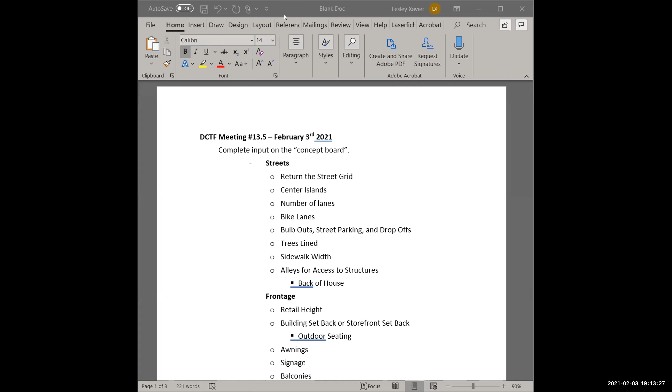All right. Very good. So I'm gonna basically mute myself. What I'll do is I'll give a little prelude of what the topic is, and then I'll mute and I'll take down notes for everybody. And then I'll send them to Lesley so she can send them out, because I don't want to be in violation of the Brown Act.

And that way, if there's any corrections or issues, we can make those corrections. And if there's a little bit of additional feedback, you can clarify, and then we can get this over. I'd also like Atisha, if you're very familiar with the concept board, so if you need to mark up certain things or we need to pull in the screen because there's specific areas we want to address, differences, we can do that and then mark that up so that they can have that document as a working document.

Is there any way, Leslie, you can pull up the concept board too partially and just keep this to the side? Sorry. Yes, I can. Okay. Awesome. All right. So I hope this helps.

Go ahead. I was going to say, just to clarify, we have no items on the consent calendar this evening, and we have just this one item on general business. And this is the continuation of the December 17th task force meeting discussion regarding the task force comments on the concept board presented by the consultant at our November 19th meeting. So there you go. Thank you, Chair.

Please proceed. So do we need to close the consent calendar? No, we had no items on the consent calendar. We don't need to close. Okay. So we can just go on with our one item on general business. Awesome. And so is this what you wanted me to show? Do you want me to scroll down through it? Do you want to go over this or?

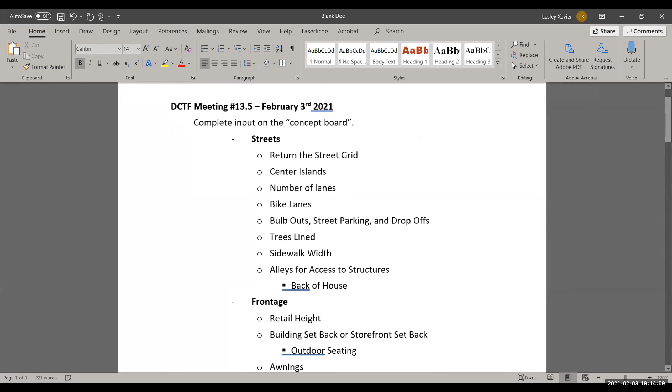We could briefly go through, like I explained. So we'll have streets, and I put in some bullet points that hopefully will spark some discussion points. Frontage talks basically about what the experience is on the actual ground floor. So that would be mostly like a podium deck or retail. Rhythm of the blocks is really making sure there's some synergy within the downtown. So it can be diversity, it can be lumping certain things together, retail size and placement, to make sure there's a good flow. And then buildings is going to be massing, building types if we want to talk about it, rooftop, and then architecture, which is important.

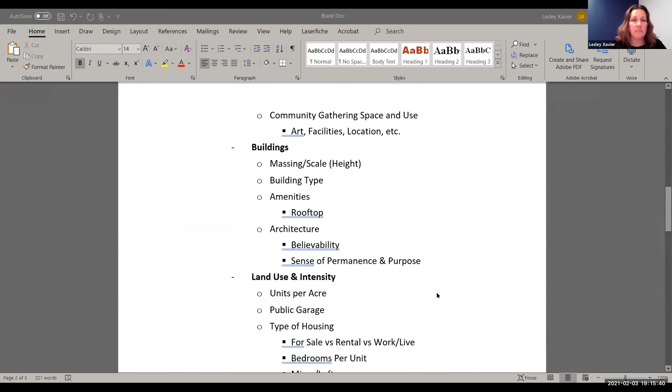And then we get into land use. So then we can start talking about the specifics of units per acre, where we want to put different things, and that kind of thing. And then I figured the economic use and activity should probably go at the end, since we need the rest of the cake to figure out if it works or if we need to go back and make some adjustments. So that's kind of a high level of where we're at. So thank you, Leslie. Yes. I hope this helps. And obviously, if somebody wants to bring up something else that's within the category, definitely bring it up and we can add it. This was just to get everybody's creative mind going. Okay.

So we'll start with streets. So streets, this has to do with, do we want the vehicles or do we want it to be pedestrian only? Are we looking for multiple lanes, side turnouts, bicycle lanes? We've talked a lot about trees, but this is where we want to formulate exactly and be as precise as possible, to give direction to the urban planner. So let's start with this. And is there somebody who'd like to start us off?

Adam, should I be sharing the screen? Because I think it might be easier to look at the sections and do that. Yeah, I guess, how do we want to, I'm just trying to think. I got a suggestion, Adam. Go for it. Why don't you email this document to everybody right now? Well, Leslie can. Yep. So we don't need it on the screen. Perfect. Okay. Thank you, Rob. You're welcome.

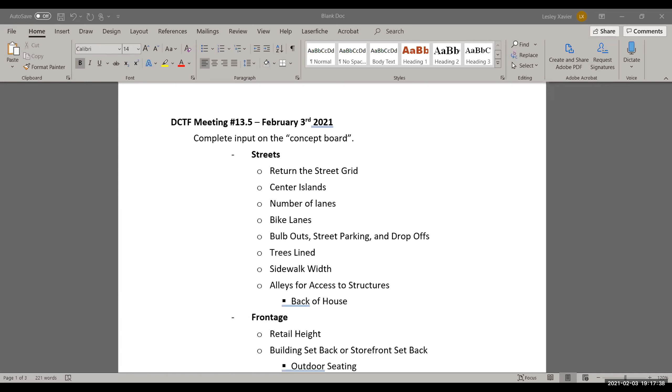So yeah, we'll let Atisha share and Leslie will send out. Sorry if we were not quite as prepared. It's on me. No worries. All good. I think there were a lot of hiccups today, and we are set for a smooth start with a whole new concept board and everything else. Yeah, so no. Thank you.

Okay. So who would like to open up the discussion about streets? I can start if no one is taking the lead. Go for it. I think we need to think of streets. Each street should have a different function. So there are definitely some of the logistical functions that some of the streets will have to fulfill.

This is a downtown. We need services and fire access and dumpsters and trucks, garbage, trash trucks, and all of these. But then there are certain streets where we need to keep all these services very far away from, so that those streets can actually have trees and really good landscape and placemaking elements. Just from experience as a landscape architect, I know that once you start putting all these services along the curb, it really impacts the flexibility of design you have with placemaking.

So I would definitely suggest that. It will also keep a lot of traffic away, especially if the garage entrances are aligned to maybe certain streets, like not having any garage entrance aligned on Franklin Street. That will really help keep Franklin Street more pedestrian friendly, because there won't be gridlocking and congestion if the garage entrances are not on Franklin Street. So yeah, those are my 2 cents.

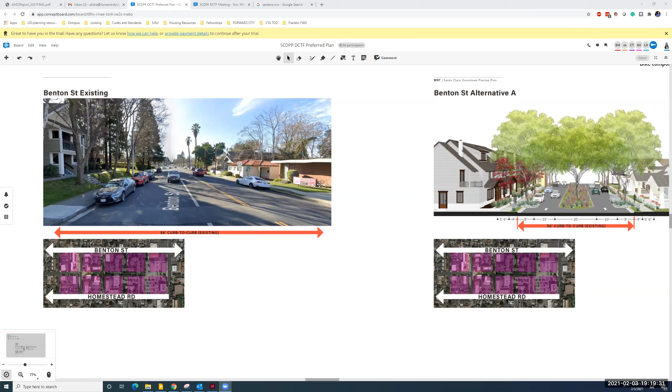Are there areas that we would want, if we go to the street map real quick on the concept board, sorry, would we want to mark out which streets we would want to be more pedestrian driven and more vehicular driven and more landscape? I mean, can we do that on the board to kind of give them an idea of what we're thinking?

Yeah, so I would say Franklin Street should be more pedestrian and very high quality placemaking, no services. And maybe then Washington can become another service-oriented street. And then maybe Jackson could become a service-oriented street if we want to keep Main Street more pedestrian-oriented.

Because if we make Washington a service-oriented street, it's serving all these 4 blocks. And similarly, if we make Jackson a service-oriented street, it's serving all these 4 blocks. So these 4 blocks can be served from Jackson. And then we can have this and the Main Street, which I'll go back to the yellow color, as more pedestrian friendly streets, because this also connects to the Mission Library.

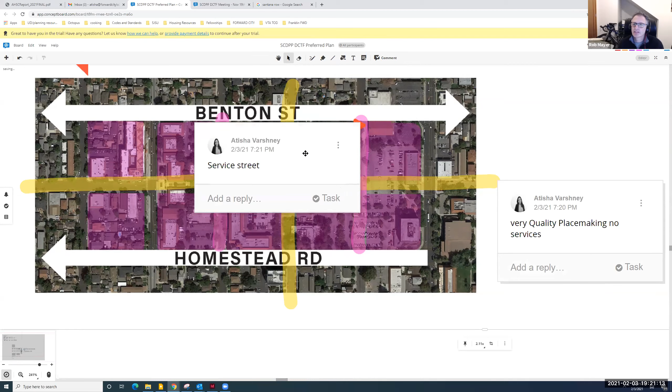Thank you, Atisha. More comments from other DCTF members? Yeah, I'll jump in. Awesome. Okay, so I think it's important. I like this process that we've started here.

The image you had of Benton Street where you had, I'm going to talk about the island again, and trees, bike access, right? Where will the bikes or trolleys or whatever, how are we going to connect to the train station? And to Homestead. I use Homestead to go all the way down to Foothill Expressway and then up the peninsula. So to me, that's the better bike route. At least it's got a lane there for the most part. So it's important for the urban planner. So this one's better because I think this is an alternative.

The main thing with the street is, as long as it handles the traffic and the bikes and everything's good, then if the median works, it works. But we want to make sure it's a complete street. And that's the key, right? And then safety at the intersections, because I think those 2 intersections are somewhat among the troubled intersections. I guess it's Monroe and Benton, I've seen stuff happen. But anyway, the urban planner knows how that works.

But that's my comment, making sure that we have a clear, do we have any comments about what we think the bike route should be? If you're going from the train station, you've got to go down Benton pretty much, because you don't want to put them on Lafayette. You want to get them off, get them down Benton. And Atisha, this would maybe be for you, would you put it through the downtown at all, or just leave a bike element on the periphery?

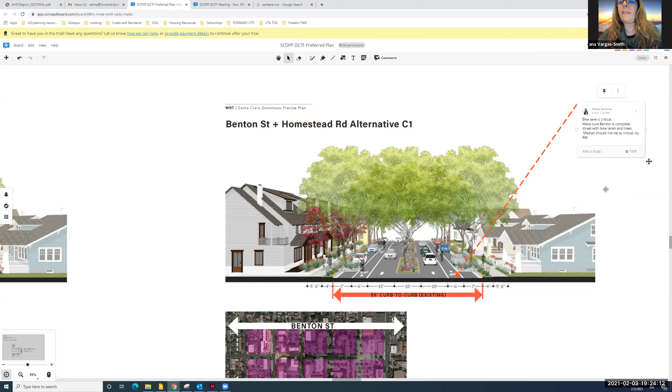I wanted to echo what Rob was saying. I'm not a big fan of the island because, like, you're correct. The most direct route from A to B is going to be Benton from the train station. And with all the density that they're planning over there with BART and all that, and Coleman, it just seems if I'm landing at the train station, I'm taking Benton somewhere. So that should ideally be the bike path location.

But also, I'm concerned with the trees in the island because fire trucks will be using that, because the fire station's right down the street. Will that be an impediment if there's a fire truck and a trolley and some bicycles? I think Benton will be a heavily trafficked area. So the island seems like a lot going on in a very direct route that's going to end up at our downtown area. That's my concern. Nothing else goes straight to the train station, not even Homestead. That's the only main road.

Are we using the Zoom raise hand function, or should I just go like this? You do both. Just go ahead. Cover all your bases. If anybody hasn't noticed, I'm not timing anybody. I'm hoping we'll self-regulate, and we've been doing great. So let's just keep it up.

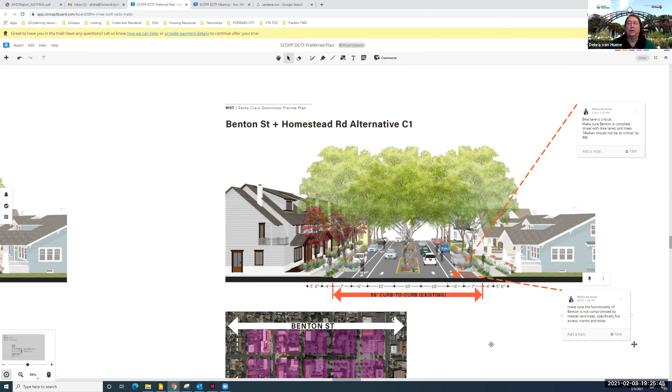Good job, team. Okay. Yeah, I just wanted to ask, if I recall right, Benton all along there is still 2 lanes in both directions, right? So if we were going to increase the width or add bicycle lanes, we'd need to do a road diet there. No, I think Benton is 1 lane each way. Oh, it's 1 lane each way. Right. So we could potentially get rid of the turn lane or potentially talk about on-street parking. Okay, but there's no bike lane right now.

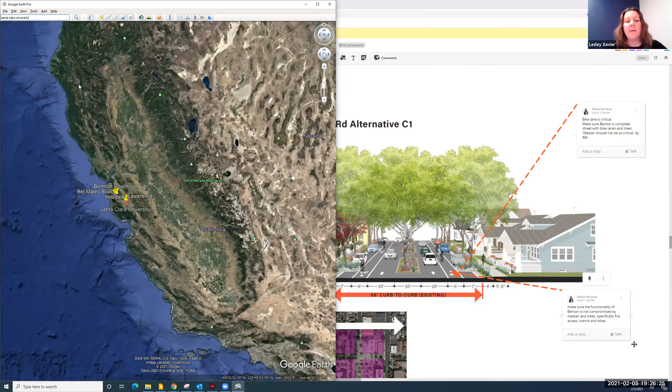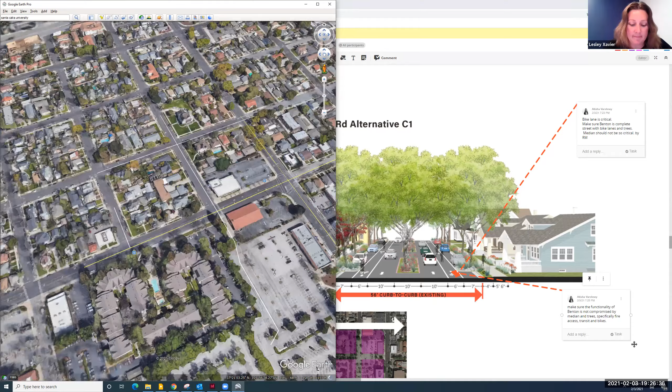Isn't there a bike lane? There's some bike lanes on Benton. I don't know if it's right here. The reason I'm asking is, and I could be mistaken, I thought there was no bike lane there right now. In this section of Benton, there's no bike lane. It is 1 lane each direction with the center turn lane and parking on the street. Oh, okay. So the homes of existing residences would keep their frontage, right? And we would have to widen Benton to add bike lanes on either side? Or remove street parking. It looks like the bicycle lane starts right now at Monroe.

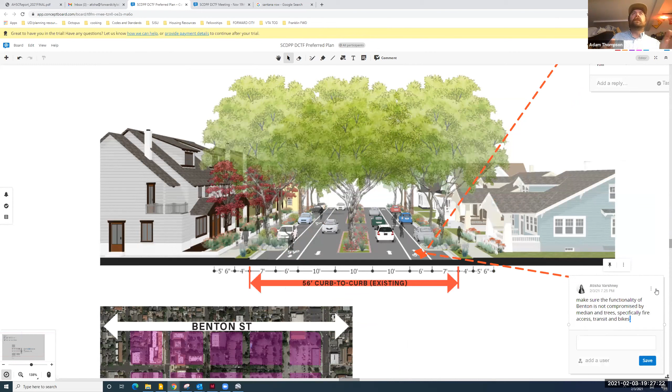I think the most important thing from what was said earlier is that Benton's really our only connection to the train station, right? So I think it's really imperative, and I know this is not surrounding the downtown, but just putting it in suggestions to make a bike lane between Lafayette and Benton and the train station. The reason I'm raising this is that we may have to actually widen Benton a little bit on the south side, cut into what the developer might think is available square footage for them on that side.

So Debra, if you look at this section, just to clarify, the current Benton Street is 56 feet wide, curb to curb, and the proposed section is keeping it a similar width. The lanes, even the single one-way lanes, are super wide. So there is some space we already have in the over-planned width of the current drive lanes. So the proposed section is actually keeping the curb where it is. It is just creating more bulb outs to put more trees and put the cars in between. Okay, thank you.

No, I had a question. I didn't want to make this my statement, but what about room for the trolley if there were a trolley going down the center? Well, are we talking specifically about Benton? No, we're talking about any street.

Okay, I'll hold. Real quick, Atisha, you said 65 feet, oh, 56 feet, sorry. And then what is the minimum? I know it shows 10 here. Some lanes are only 8, right? What's really the minimum that we could squeeze the lane and still be potentially efficient?

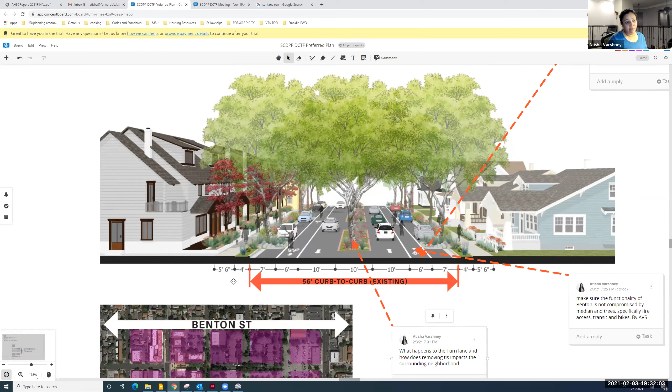I think the parallel parking dimensions are as squeezed as they can get to be. Usually you go with 9 feet, and 7 is the minimum, and they are showing 7. Chair, this is Manuel. Can I speak to that real quick? Yes, sir. Yeah, just from a perspective on the bike lanes, since you asked that question.

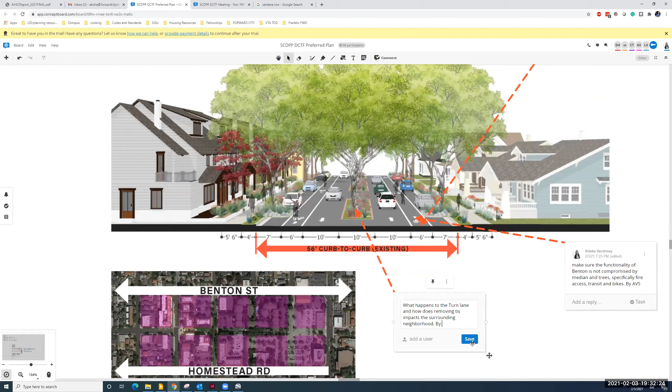So typically it's a combination, right? The minimum you would want to go with, unless you have a situation where you can do otherwise, is a combined parking and bike lane of 13 feet. You can choose to go with either a 7-foot parking space with a 6-foot bike lane like you do here. In some places you go with an 8 and a 5.

Typically, if you can, the 8 and 6 would be better, but a combined 13 feet, you don't want to go below that unless you just can't fit it otherwise, which you will do in some cases. Think of that 13 as your minimum combined, and then go a little wider than that if you can. Well, that's the exact point I was trying to make.

I want this to be a very friendly place to ride bikes coming from the train station. We need to be progressive on what we're proposing here so that we're not doing what they used to do. So that's why I still struggle with the median trees, because to me it's more important to have a safe biking environment around this downtown. If it's crummy in other areas and they come and go, why does it feel different? I want them to say that.

I'll give you another perspective as well on the bike lanes. There's trade-offs because you have a width here. Typically if you want an even better biking environment, you do want to have the 6-foot bike lane. And in some cases you'll stripe a 2-foot buffer between the bike lane and the travel lane to create additional separation.

And I did hear about the median and the trees, and about narrowing the median down. I don't have that exact number for you, but as you narrow the median down, there comes a width where you can no longer put trees in it because of safety issues on separation between a vertical object and the travel lane. So just something to be aware of. And probably one thing you might want to consider is really what you're trying to achieve.

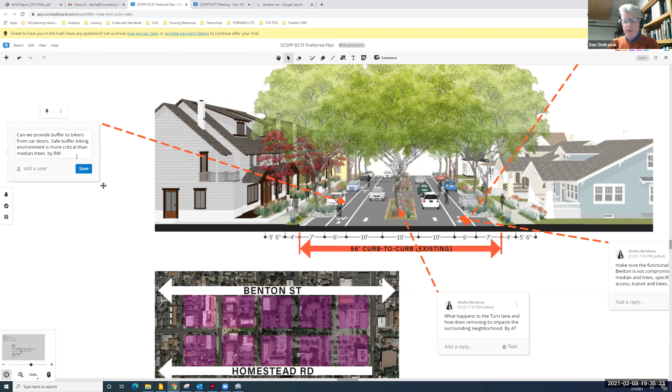Okay, so I had a couple comments. So let's go one at a time. I'm going to go back to Franklin where Atisha had talked about, and I want to make sure I heard this correctly, that you were recommending Franklin be a pedestrian only street? No, it is a pedestrian oriented street. Okay, good. It is designed to prioritize pedestrians and pedestrian movement over cars.

Right. Because the comment I have, there's a couple cities we've studied, I think it's Jacksonville, Florida, and we've seen it in California cities where they completely close off the street and the end result's a ghost town. The balance is you have traffic calming, but you do have traffic along with pedestrians on the side. So that's fine.

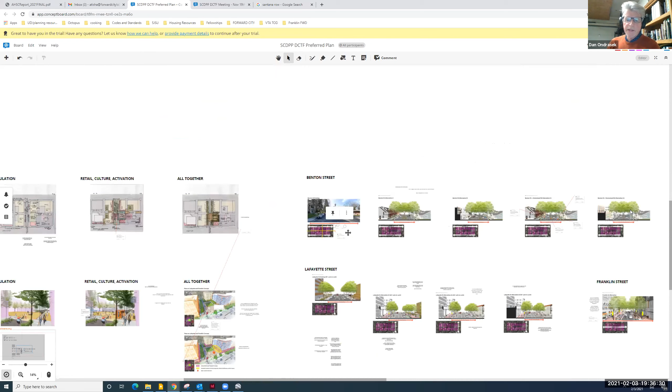Regarding Benton, and I know this is off agenda, but our group is very, very focused on that trolley and connecting the train station with the downtown. I don't know if I'm speaking for the entire group, but many of us are looking at Benton as a thoroughfare for that trolley. And that could impact what Rob's talking about as well. If you've got 10-foot wide traffic lanes, I believe I heard 7 feet for bikes, and then you want that buffer between the cars plus an area for trolleys.

And I'm not talking about tracked trolleys. These would be autonomous vehicles. I was going to ask that, Dan. I don't think many people are putting in actual tracked trolley systems anymore. No, they don't work. Now the idea is that there'll be some type of option for an autonomous vehicle to be able to travel between the station and the downtown.

Thank you. Okay, and last point I had was, if we do have pedestrian specific streets, it'd be Jackson, Washington, those streets right there. But I agree with Main and Franklin being thoroughfares. I'm confused. Could you repeat that comment? So if we're closing off streets, and I think we've discussed that in the past, at times, maybe not all the time, it would be Washington and Jackson. I don't know if you can put the grid up. So where you have the purple lines, those are the two that I think are less impactful, where you want Main and Franklin to go through.

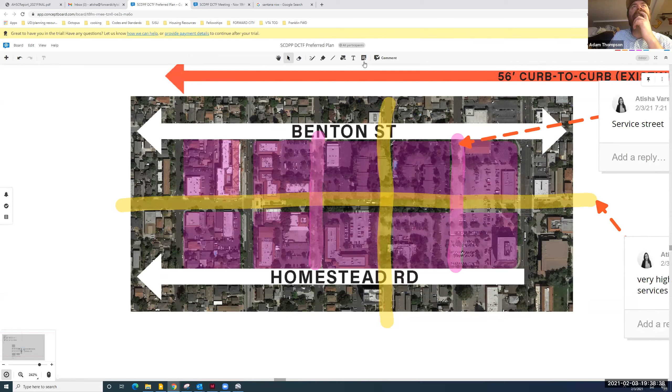For traffic? And then Adam, do we want to talk about thoroughfares into the quad at this point, so we don't have a beeline from downtown going through the quad, but you have traffic abatement? Yeah. So one thing that we were kicking around as a group, some of us on the task force, is ways that if you're coming out of the downtown, let's say on Main Street, you just don't beeline it right through the neighborhoods of the quad, that there's traffic abatement that directs you either right or left. So it diverts cars out of the neighborhoods surrounding the quad.

I think that's a real important thing that we maybe don't have to discuss today, but I want that on the radar. I think that's all I got.

So, trying to keep it to a minute. One thing I would just clarify: when we call something placemaking streets, and this is just how we call pedestrian-oriented streets and make it more highlighted for pedestrian amenities. Usually those are the streets which are preferred to be blocked off for events, because they would have more benches, more utilities, more arts on it. And then you would let the service streets be the thoroughfare streets.

And if you look at like Palo Alto downtown or Mountain View downtown, the way they have blocked the streets for slow streets, that's exactly what they have done. The service streets are more thoroughfare streets because that's where your garage entrances and your trash truck and all these critical services are coming into. But the pedestrian streets, because they don't have these critical automobile functions, they can be easily blocked off. So it's the opposite of what you just suggested, Dan. Understood.

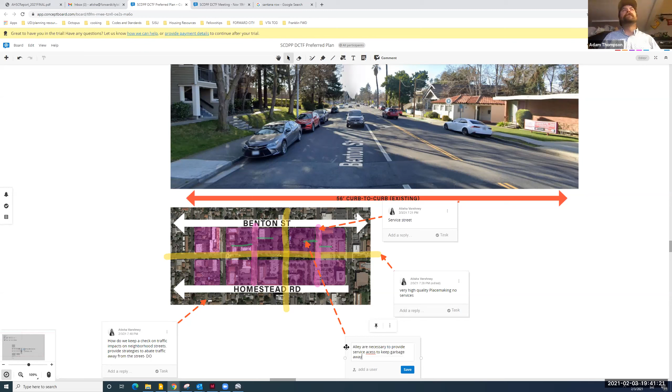Okay. A couple of notes I have, just again, reinforcing Franklin Street. I think it should be both pedestrian and vehicle access. I have to agree with Dan on that. I think we always need to remember that Franklin Street's going to be our kind of grand boulevard. And I don't mean that in width. I just mean that's going to be the central gathering place. We want to make sure we make it as flexible as possible so we can close it off at certain places if we need to for festival or events, or open it up to traffic.

The second piece I'd like to throw out, and again, this came from Chris Shea a while back. We haven't been having any conversations on whether or not there should be conversations with the university of bringing the trolley down Franklin Street through the university. Again, I can't speak to that. I don't think Chan can speak to that, but there was from the university, from Chris Shea early on and Mike Crawley, about that access through the university for the trolleys. So we kept them off Benton Street.

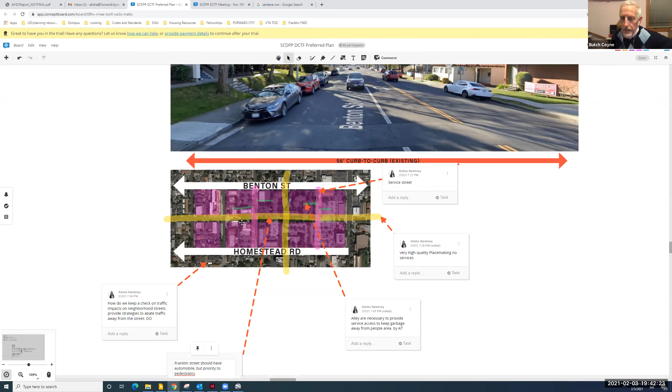Again, just something to put out there to discuss, and what impact that would have on Benton Street if we did make the trolley run from Franklin Street from the train station all the way through the downtown. As we all know, it all historically fits to what was happening back in the day. So just a piece on that. And then the third one, my head was swimming after our last meeting on Lafayette Street. With Lafayette Street, I'd just like to throw out there, if street parking was removed from Lafayette, would that give us an opportunity to have 2 lanes each direction and a possible turning lane going into Franklin Street into the downtown?

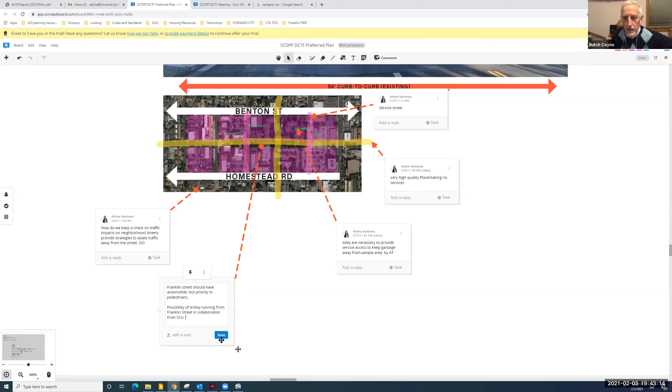I think that would be ideal. Again, I'm not quite sure how bike lanes would fit into that or how bus lanes would fit into that scenario. But the more and more I thought about it, the more this 2-way traffic in the middle is just a little bit cumbersome. So I'll leave it at that. Real quick, just so I get your note correctly, Butch, your question for Lafayette is to remove street parking in order to provide 2 lanes in either direction as well as a turn lane into the downtown. Is that correct? Correct. Thank you.

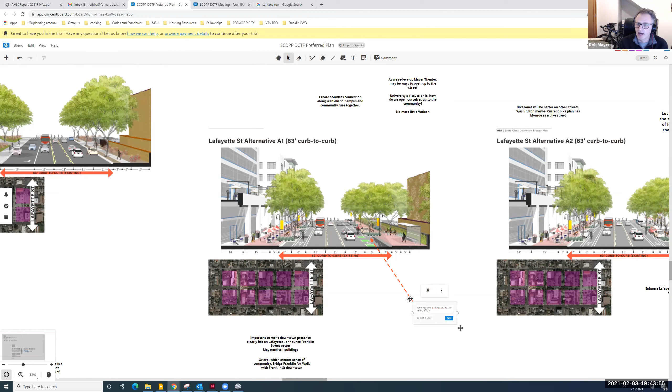Can I add a comment on to Butch's about that Lafayette? Please. Yeah, I think what would be really helpful, and this is what I was hoping at the last meeting, was to know what is the width of Lafayette beyond El Camino? Like, what is it? And then between Benton and Homestead and then beyond, right? Because we've been told what a standard lane should be, right? It's at least 10 feet. And then we would have a better understanding. That's what I was hoping in the last meeting, that we would get to the numbers and say why and how. So anyway.

Hey guys, I want to cut in. My phone's burning up. I think it was stated, but Benton was put in 5 months ago as far as all the bike lanes. They're currently in place. So a number of people wanted to express that, if they haven't done it on the chat.

All right. Are there any additional comments?

I had a question for Butch, actually. Butch, I do remember that conversation with Chris Shea about the trolley, and we like that idea. The question that was never answered is how do we get it from the train station, El Camino, to Lafayette, to the Franklin Paseo of the Arts on campus, cross Lafayette and then down Franklin.

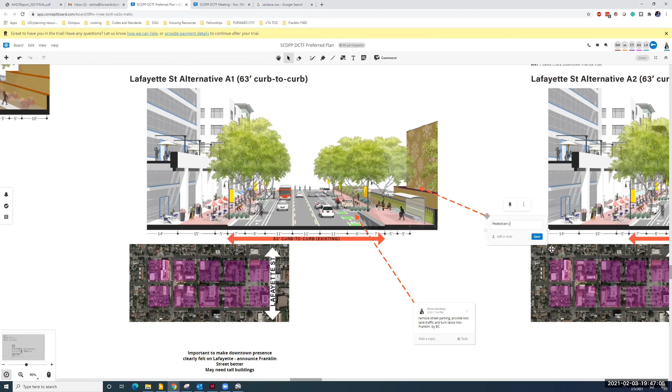Because as a person who crosses that quite often, getting to and from the campus, the blinking lights that are currently installed on Lafayette, drivers don't always know how to use those. I think more visible, colored crosswalks, just to warn people that this is a pedestrian crossing, would make the area more inviting for people to cross through those really wide streets right now.

And Chan, that's a very good point, because it also adds to the placemaking. As soon as people are at these crosswalks, they start feeling that they're in a pedestrian friendly environment, and they can let their guard down. They can start enjoying and experiencing the downtown rather than having to worry. So it's also about the subconscious safety that we all feel. Yeah, I think it becomes a visual.

You know, when I traveled to Idaho, there were some wide streets and they use flags. It's kind of an afterthought, but they have flags on a pole, and the kids love holding the flags up. And I think Campbell or Willow Glen has one section with the flags, and of course you can do the lit up ones on the street, but the flags were a hit with my girls, and it's something unique, and the flag can say Santa Clara on it, or Santa Clara University for that matter. You sponsor and buy the flags, and there you go. So there's some opportunity there.

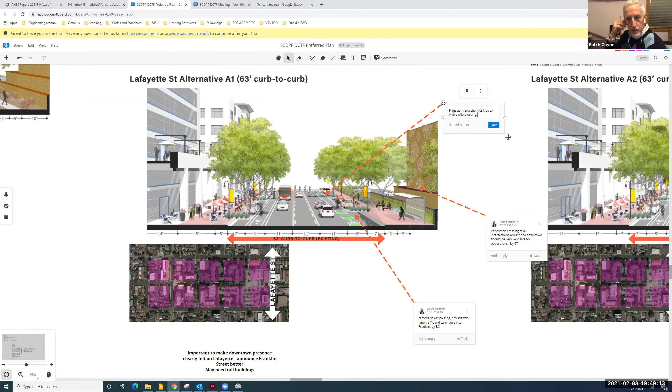That's a great idea. So just to keep us on track. Oh, sorry, Butch. Go ahead. Just a note, because I had that one also, pedestrian crossing is vitally important to the university, especially with building an arts center complex along the Paseo. We are going to see pedestrian traffic going back and forth quite a bit. Awesome. Thank you, Butch.

So just to keep us on track, I want to ask for final comments. If anybody has anything final, remember, I will be sending this out with notes cleaned up for a final look over, and people can add additional notes or comments.

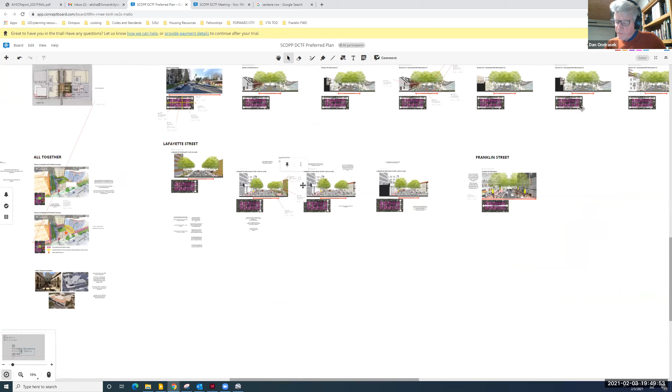But I do want to make... Well, one thing we didn't touch on was sidewalks. I don't know, we could put that into frontage, but sidewalk width. And then I'm going to save this for land use and intensity, but the public garage, the best street for the access to the public garage. So I'll hold comment on that. But do we want to go into sidewalk widths at all?

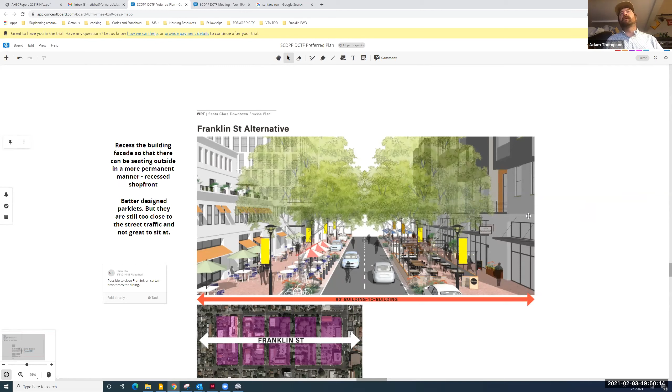Yeah, I think we need to just kind of decide: are they all the same, or are they going to be different in the different areas? So yes, that's a great point. Let's wrap up with that. Thank you, Dan. Okay. You should look at the Franklin Street section, and I see only one section here right now. It says alternative, but why don't you guys discuss, and I'm going to see if there's another section on the previous concept board. Well, there's only one. Okay.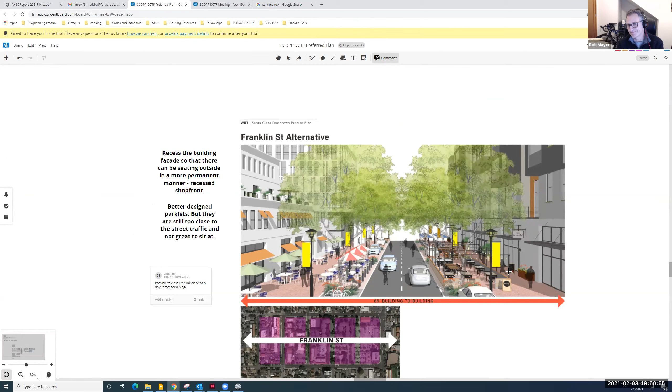My one comment is, in some of those images, you see all the seating out against the sidewalk, and I hate that, because the servers have to bring the food all the way out, and I like it against the building, which is more European. So that's just kind of my comment about sidewalk. It kind of goes hand in hand. Yeah, go ahead. I wasn't going to jump in here, but in Spain, it's the other way around. And Rob, I know you and I have an ongoing debate on this. But in Spain, they put the dining right next to the street. Even in Santana Row and Castro, they have that.

Well, but in Santana Row, they have the little kiosk kind of wine and food out there in the middle, right? No. Some of the restaurants have. Yeah, I think it's an afterthought. They basically take the parking and make it happen. And I think that's why we see it almost prevalent in most places, because the sidewalks weren't wide enough. So they end up using the parking. It's that Campbell model or Mountain View, where you have the parking when you need it to get visibility, then you take it away when everybody knows it's there.

For Mountain View, I know Bruce had said that they hadn't thought about outdoor seating. Bruce Leadstrand, who kind of put that together, and that they kind of overtook the parking bulb outs in order to facilitate more seating. And like Santana Row, for instance, they have one row of seating like at Left Bank, and then one row across the pedestrian pathway, and it feels like you're kind of out there, and sometimes don't even get the best service because of the distance. So, Adam, would you rather be sitting next to cars? I was in Campbell and we were seated right on the street and everybody was cruising, or would you rather sit next to pedestrians?

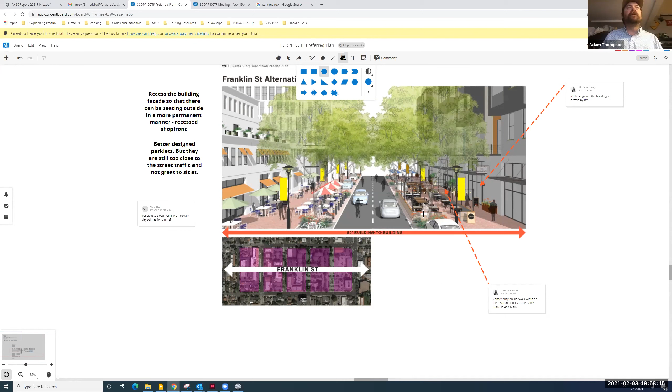Can I make one quick comment, Adam? Nope. Come on. I'm laying it down. You can put it in the email. All right. We're too long. Sorry, Rob. It's okay. I hate to do it. We're gonna move on. I'll get you one way or another. I know everybody's gonna get me. I got to be the bad guy sometimes. Okay. Sorry. I want to get to everything else. Yeah, I think it's fine.

It's fine. Sorry. All right, let's move on to the next item, which is going to be frontage. So in frontage, we talk about retail height, building setbacks and storefront setbacks, outdoor seating a little bit. So maybe your comment, you can come in here too, Rob. Awnings, signage, balconies, consistency. It's basically the pedestrian experience as they're walking. So I'll let you all start on the comments.

Who wants to jump in? I'm going last this time.

Okay, I can go. So I would say in terms of frontage and going back to some of our streetscape widths we were talking about, it is important to understand that the sidewalk width and what happens in front of the building should not be just limited to dining. For private businesses, we need some open spaces with just benches where family can sit around, the dogs can be tied up. We need places for parking bikes along streets.

So I think we need to think of frontages not just with dining in our mind, but with all of the functions that need to happen on the sidewalk, like Uber, Lyft drop-offs, and just like, I want to have an ice cream and sit on a bench and I don't have to walk to a park.

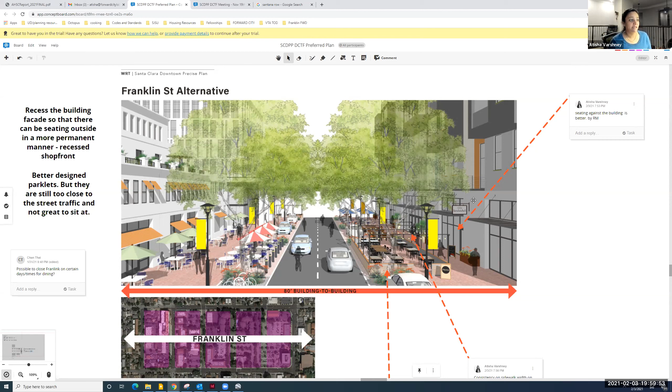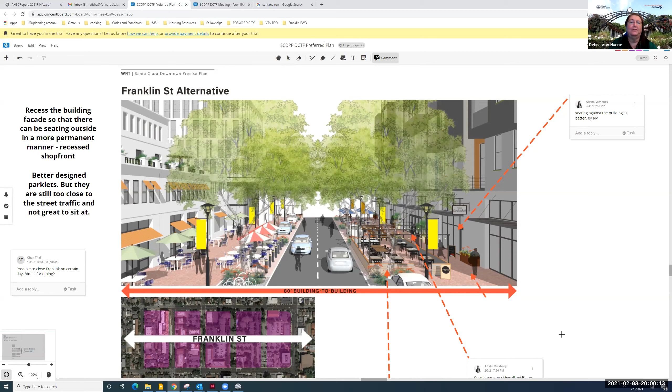I can just sit there. Places for public art, places for kiosks, because we are really wanting to support small businesses. Where is the place where we can have 8x8 kiosks just popped up? And these sidewalks should be just wide enough to accommodate these flexible uses as they come. Right, I agree that they should be flexible uses, because what's in front of a phone store, for example, would be different than what's in front of someplace with outdoor dining.

But also in this sketch, is it showing on-street parking there? We're not going to have any parking on Franklin, are we? At least not in this one. I feel like in this one, the sidewalk width is about 26 feet. So this width is about 26 feet because Franklin Street is 80 feet wide. And if we remove 24 feet for the driving lanes, then that's 26 feet. And I think that's as big as Market Street in San Francisco. So that's super wide. Okay, but we're not going to have any parking on Franklin, are we? I think that's up for discussion.

I am not seeing other sections that show more than one alternative. I don't know, Leslie, if there were more design options for Franklin Street, but here I'm seeing only one design option. Yeah. I think instead of trying to look for it, let's just state, do we want on-street parking on Franklin, or do we want to limit on-street parking anywhere? I mean, we're kind of jumping back to streets a little bit, but real quick. I don't want to go down a rabbit hole, but are there ADA restrictions, like you have to have handicap parking in front of retail, Atisha? No, there is not. Okay. So do we want to make a blanket statement, or do we just want to fill it in? Because I want to keep going to frontage.

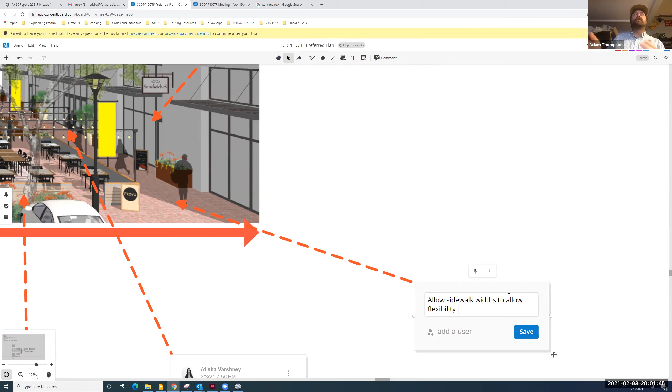Adam, let me just throw this out. I think making that a flexible option might be important. A lot of retail will argue that the street parking is critical. I think until there's a kind of tipping point of critical mass of activity on the street, making a decision on the front end that precludes some on-street parking might be a mistake. Yeah. We want to be able to figure out how to incubate the activity we need to really fully utilize the width, and in the short term it benefits small businesses to have parking in front.

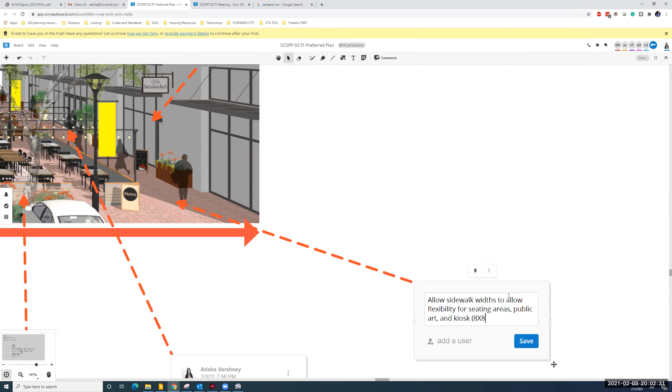Yeah, just to be clear, these are what we feel we want. When we send this, I expect the urban planner to correct us if we're making mistakes, right? And really kind of push back based on their experience. It's just what we see as our vision, and then they're going to give us the guidance and their expertise in shaping the final plan. By no means is this going to be the definitive, but yes, I wrote down your comment. Thank you, Matt. It's very good. Thanks for clarifying that, Adam. That was good. Yeah, sorry, I should have said that in the beginning. I missed it. So the intent is we're paying them for their expertise and advice.

And even though we want, whatever, a 2-story building, they're going to tell us, no, that's not the right thing. Or, hey, we think retail's here. They should be pushing back and saying, no, this is the better way to do it. But at least they have a basis for starting. They're not starting from scratch.

And I kind of like that because as we are seeing with all the slow streets and COVID, a lot of parking spaces are becoming parklets. So we should give the retailers the flexibility: do they want a parking space in front of their retail or do they want a parklet? Oakland has a certain program that allows retailers to rent out parking spaces long-term to put parklets. And I think some program like that might be helpful here.

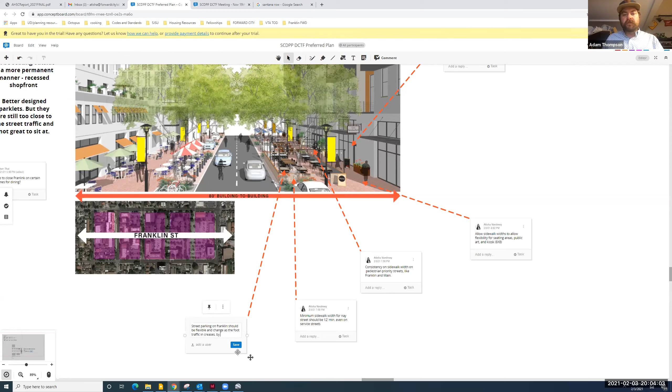Okay, well, let's jump back to the frontage. So if everybody has that pulled up, I have areas for artwork and/or other public spaces. Under frontage? Yeah, under frontage, I think your first item was retail height. Mhm.

Do we want to set a minimum? Well, okay, I want to ask, again, I'm going to defer to WRT and Sergeant. Maybe Atisha can, it looks like she left for a minute, but what I've read is that you're not mandating architecture, but you're mandating a consistency of retail height, of window height. So you don't have the, and we're going to pick on them, but the Sage porthole kind of phenomenon where you don't know what the hell is going on inside. There's a consistency of windows and you can look in, a consistency of doors that are facing the same way.

And really important, this is something I just read today, is that those residences above the retail, that you have a consistent place, an entranceway that has a stair or what have you up to that, and that's denoted in the scale of the facade. Atisha, we were just talking about retail height and a consistency or semi-consistency of that between the buildings that are built especially on Franklin and Main. Is that something that, we'll defer to WRT and Sergeant, but is that something that you've found to be the case?

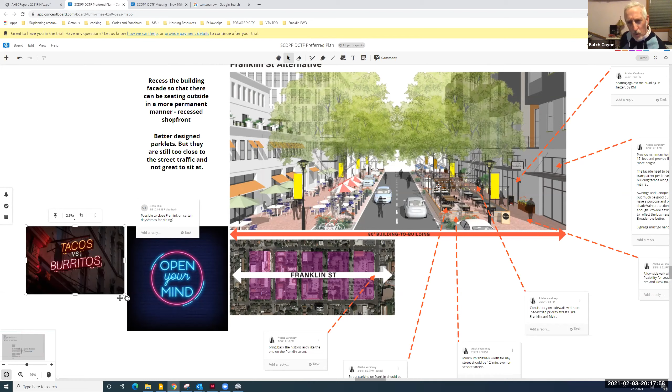Talking about frontage, looking at this rendering, for me, it feels very flat, cookie cutter. You walk down a block, you hit a corner, you turn. Is there any discussion about, I've been in a lot of cities where you find these kind of hidden piazzas, plazas, alleyways that pull you in. They're not a street, they're literally an alleyway where you have small little drop-in businesses along it. Like a courtyard? Yeah, courtyard type, but it has to be balanced so it doesn't become this empty courtyard. I think of downtown San Jose where they have the Bank of America building. They have that plaza there that's never used. They're going to tear it down because it's not easily accessible.

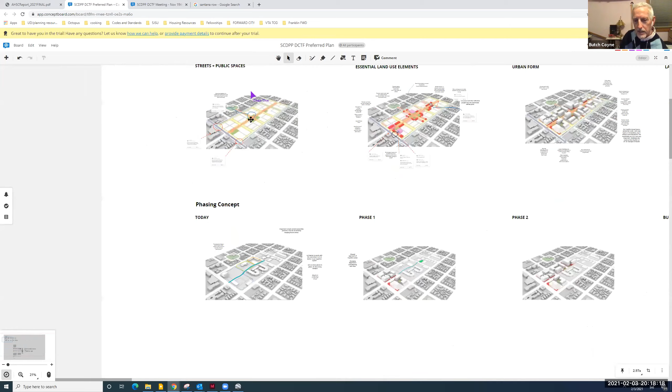I'm thinking down to like San Luis Obispo. You're walking down their main street. Here's a nice little alleyway you turn into. Here's a little shop, a little store, a little something. There might be a little gathering place that you can sit. So it's not just so flat, cookie cutter. I walk down Mountain View, and except for the cutouts to get to the parking behind, it's very uninteresting. So I agree, Butch. Those kind of hidden gems that you find make it a unique downtown, make it feel kind of a throwback to our history a little bit. So when we're talking frontage, just some of those ideas.

Yeah, so it's a great point, Butch, and that's part of the problem with huge developments, because back in the day, they pieced things together, and sometimes there's nooks and crannies and variety, and we're challenged these days with these podiums.

That's what everybody's building now. So it's the nooks and crannies; the alleys I think are going to help, but what's on the edge of the alley, right? Is there something cool there? Yeah, I mean, that's great points. Somebody, go ahead.

Bringing back this diagram from the precise plan, definitely there's an idea of alleys, like breaking these blocks, so making sure we don't get these podium buildings. And these alleys will also be important to provide service and fire access. So there are definitely all these gray lines that are being drawn as alleys.

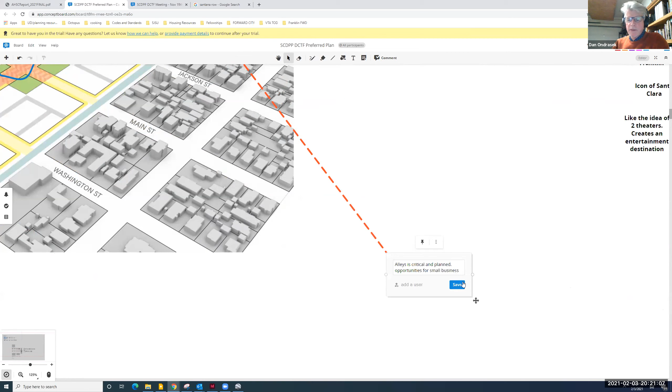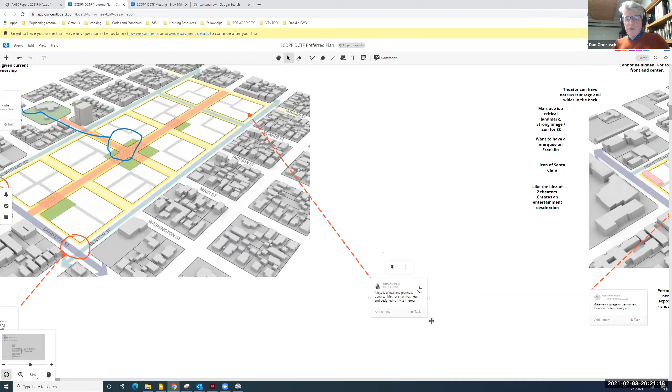And I hate to bring it up, but Santana Row, I'm not a big fan of, but there's that one little courtyard area that you can't deny. It draws you right in, right by the French restaurant, the Left Bank. Yeah, to go to the parking through there. And again, I'm not advocating Santana Row, but that area is special. I like it. Unfortunately, that's one of our only examples we can point to of a new development that has a lot of things right.

I mean, there's Campbell and Los Gatos, but those are older products that we would not be able to replicate. Sorry, go ahead. I think it's also a combination of, if we give all the 10 blocks to one developer to develop, rather than it happening a little more organically, which will give us that interest in architecture over a period of time, different kinds of treatments, and we learn from one lesson to the other.

But just to put one more note on my frontage discussion: oftentimes we will define a build-to line in downtown codes. And I would suggest, instead of providing a build-to line that every building has to be built to, we provide a 10 feet margin that you must build between this line and this line, because that 10 feet or 8 feet, which we will give to the designers, can become these really interesting open, semi-open spaces as well.

And some buildings will try to maximize and build closest to the property line, and some will set back. But if we provide that flexibility, or maybe say that 50% of the facade should be built to the build line and 50% should set back, that will give us some of those nooks and corners for cool signage and outdoor installations by small businesses.

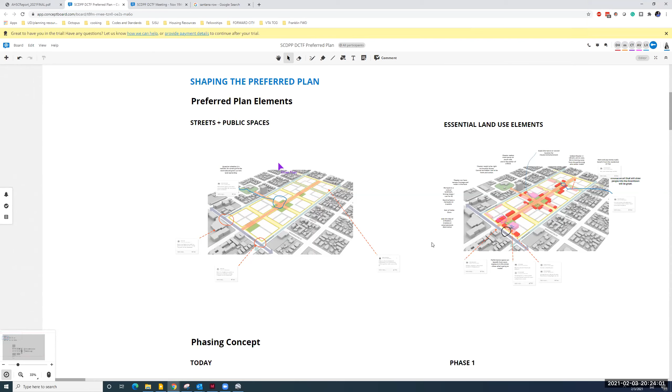Mr. Chair, can I, this is Manuel again, just want to add a clarification. I apologize for jumping in the middle of the discussion, but I know you all know this, but it's always important for the audience to know as well if they haven't been part of the process. I think I heard somebody mention something to the effect of if we give all 10 blocks for a developer to develop.

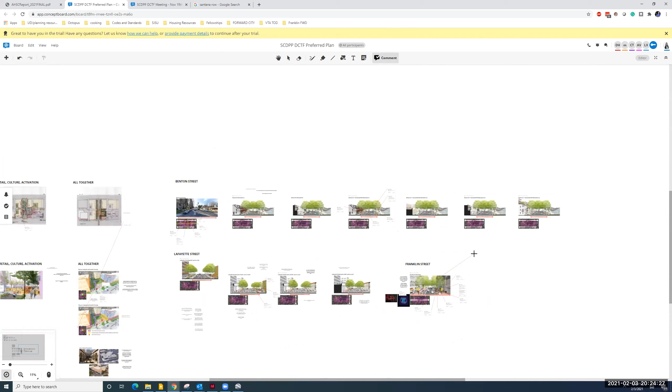I think it's just a good reminder for everybody that all these different parcels have different ownership. Some are bigger than others, but there's a lot of different owners, different parcels that are under private ownership. And the city only has 6 acres, which of course will have to go through its own process. So obviously the city doesn't force private developers to develop, and there's no process to give it to one developer to develop all the sites at one time.

I know the task force knows this, but I just wanted to make sure that that was clear for the attendees as well. Thank you, Manuel. And Manuel, I'm sorry, I should have mentioned, I was just trying to compare it to Santana Row. Sorry. No, that's okay. I assumed it was something like that, but it wasn't clear. I just wanted to make sure that was clear to everybody. Thank you.

Atisha, real quick, I know you were talking about having some flexibility in the setbacks. So is there a minimum, or do we want to set the 0 as where we would prefer the setback to be, and then also define potentially what our allowance would be? So if we said 5-foot setback and we'll go plus or minus up to 15 feet or 10 feet, like you had mentioned.

I think the minimum, Adam, would depend upon the actual design of Franklin Street, because from my time working on these drawings, I understand Franklin Street at 80 feet was wide enough to allow for that outdoor space. So it could be like 0 to 10, and maybe a certain percentage of that facade is at 10. It's kind of like getting into the form-based code zoning standards, but that's how you start defining it: this is the build-to line, and 50% or 30% of the facade should be stepped back at like 10 feet.

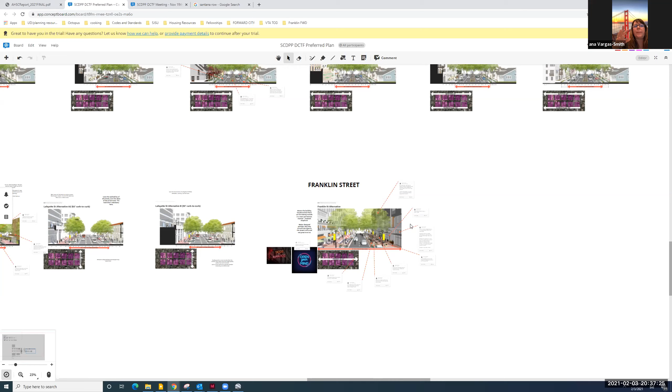Yeah. Just from a historic perspective, I think I got cut off on the signage part. It's very important that we have elements that are wayfinding throughout the downtown, because so much was lost in the demolition that I think there should be plaques on the side of the building, like this was where the city hall was, or this is where the Mission Library, if you want to go that way. I think this has to be throughout the downtown, so people are never feeling lost or uncertain in enjoying the downtown.

So having a historic element tied into our wayfinding signage is very important to recapture what we've lost, but also areas around the downtown that say commercial district. We'd like to change that to maybe historical center or Old Town Santa Clara, something that indicates something was here before, and honor that. So that's just something I want to bring up. Also through HLC, we offer bronze historic landmark plaques on the sidewalk. So maybe this is an opportunity to include it in the master plan.

Like we just want to say that this was the old jailhouse, or this was the Victorian that belonged to so-and-so along the sidewalk. So the downtown tells the story as you're walking, because I love that stuff. I'll stop and read it every single time. And we do have them sprinkled throughout Santa Clara, like Marsalli Park has quite a few. Over the Madison Street area, there's just a lot of plaques here and there sharing those stories. And I think this is a perfect opportunity to recapture what we lost. I just wanted to emphasize the signage is critical. I agree with that. I put it as historical markers where relevant.

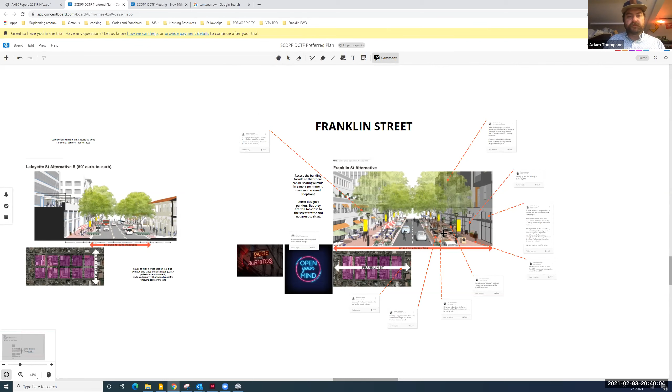Matt, you're up first. Way to go, Matt. Go for it, buddy.

I'll be honest, my initial reaction, Adam, is that there's only so much you can control. I think the instinct is good, and I think the goal is for the planners to be able to think about the structure and infrastructure needs of different uses so that there's flexibility. I clearly have ideas about what I would love to see on a particular corner, but I'm not sure that's how the world works.

Well, I think we can control it to some extent, right? Because we can say we want retail down Franklin all the way, right? I'm just throwing this out for instance, and we want to limit potential retail going down some of the ancillary streets. So you can control it within the form of the type of building we want to do, and that's what I'm getting at. I agree that you can't be so specific that it inhibits creativity and growth, but obviously none of us probably want a ton of retail on, I don't know, Lafayette, right? I would agree.

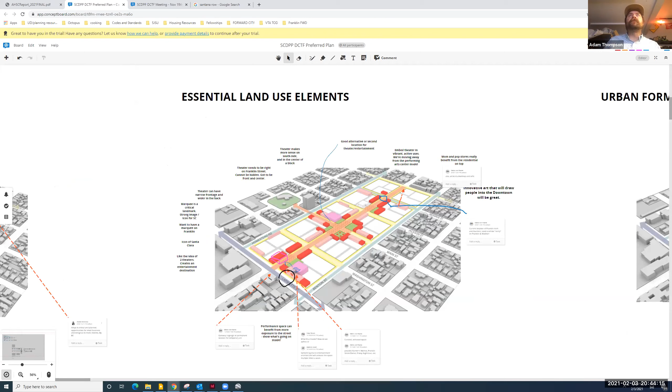Hey, Tisha, can you move the concept board to the diagram that shows the retail locations? Thank you. Sorry. Those are great comments, Matt, especially the pulling in from Lafayette and Monroe being a new thoroughfare, or like that main draw into the downtown. I guess my big concern is, retail is an afterthought for most developers. So if you don't force them, they're not going to do it, and they're going to propose as little as possible because it's a loss leader.

And we even got that from our financial analysis team earlier in the DCTF meeting. So I think we kind of have to create the synergy by saying we expect, if this is where you want to go, we expect this, this, this, and this. And obviously there's always going to be flexibility. If somebody comes in with a proposal that's slightly different, it can be heard. But if we don't set the parameters now, I can guarantee you we will get less than what we need to make it work.

So Adam, would one of those suggestions be there be at least one kind of anchor-size restaurant every 2 blocks, or something like that, versus a 30-table restaurant? Yeah, I was gonna say, it's a great point, Deborah. Almost every corner should have the anchor restaurants, right? And then you have the smaller infill restaurants as you work down Franklin, so that there's a rhythm. If you're going to be sitting outside, the corners allow more visibility. They allow more outdoor space because you can wrap. So I think those are where we identify those kind of spaces.

And then on the interior, you're going to have more, hopefully, mom and pop, but it's more affordable by size, right? You're kind of forcing the hand of saying, hey, look, instead of having 10,000 square feet, you're going to do 2,500 square feet. And I'm just throwing that out for instance, right? So it's more affordable just based on the size of the rentable space. Yeah, exactly.

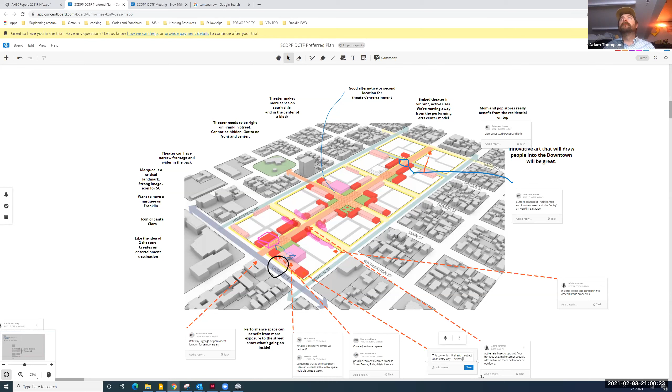Hey, Chair, I've got a comment. Go ahead. All right. So, and this is for Leslie. So when I read this, I think there's going to be music downtown. At least I hope there is. And I think the best place for that is down by the university, down by Lafayette. And by music, I mean going until 10 or what have you. We don't want to put that down by Monroe where you've got residences down there.

There is a way of zoning for that, correct? There is, yeah. When you create a zoning district, you could say that use was not a permitted use in specific locations. Okay. So that was question one.

I think the other thing, and we're at 9 o'clock right now, Adam, so we probably want to skip back down, but retail size and use and all that, I think we defer, we're going to have a retail consultant to talk about that so we don't replicate what happened at Silicon Sage, with ventilations and size. And to Rob's earlier point, building or ceiling heights that are optimal for retail widths and lengths. So those are my two comments there. And that's it. We're moving on.

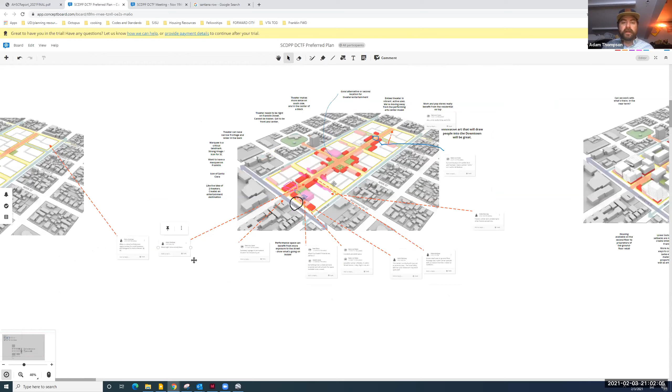All right, so now the next section, buildings. So this goes back to kind of what we already did before. So Tisha, if you can go to what we've already kind of worked on so we can just finish it off. It's massing and scale. So that's how high it is, how large is the project, building type, which is there's different construction types if we want to limit or require certain building types, and the main are really type 3 and type 1. Type 3 is basically a 5/2.

You sometimes can do a 5/3, which is a podium deck and then balloon framing above. And then type 1 is a steel structure. It can go much higher, but there's a boundary for like a cost hurdle that you have to get over. So it's not like you can just build a 9-story building and it equates out the same.

And then, we kind of already talked about this a little bit, but we can add to it, is like rooftop amenities, which obviously is near and dear to my heart. And then architecture, durability, and sense of permanence and purpose. So I'll open it up to the DCTF members.

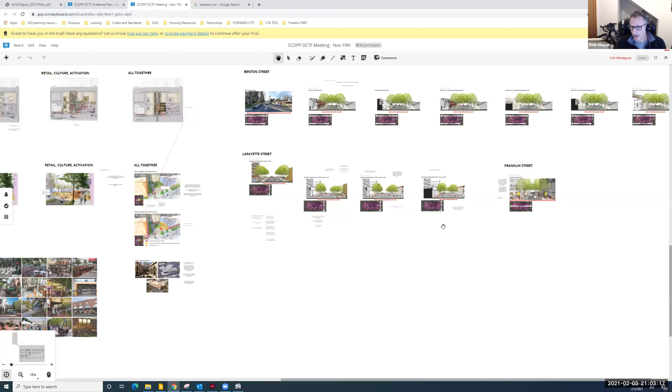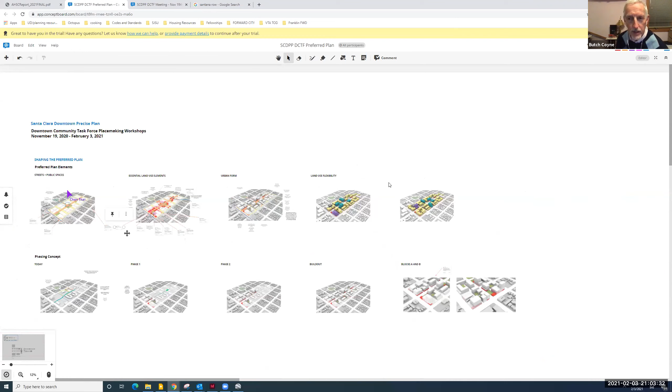Well, maybe we can do it a lot quicker because we've already had the discussion. So let's start with the existing project, which is Downtown Gateway, and then we'll work clockwise around quickly. So right now, currently, Gateway, which is a Silicon Sage project, is 4 stories, I think it's 62 feet, Leslie, or 60 feet. I can't remember. Which one? Sorry. Downtown Gateway is 4 stories, and I believe it's 60 or 62 feet, somewhere in there.

Adam, can you point at it, because we don't have control. There you go. Okay, so we don't have streets marked here. So just for everybody's purpose, that right there is Monroe. Benton is running east-west, correct? So Benton, yes. Okay, got it. Plan north-south. There you go.

Very good. Thanks, Tisha. See, this is why I had you do it, Tisha. You're way better than me. It would take me an hour to get that in there.

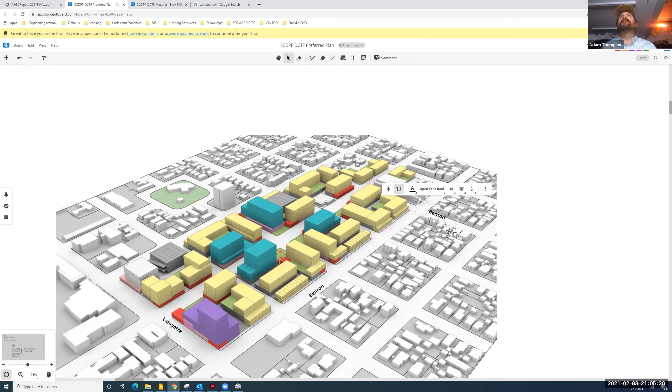So that's what we currently have, and that's really the first thing that has been built in recent history. So if we move to where Mio Vecinos is, which is the corner of Benton and Monroe, it is adjacent to some single family. You can see the little bungalows there and one 2-story structure on the corner of Benton and Monroe. Can we zoom in? 1, 2, 3, 4, 5. It looks like there's 5 and maybe 7 stories on the interior of Franklin.

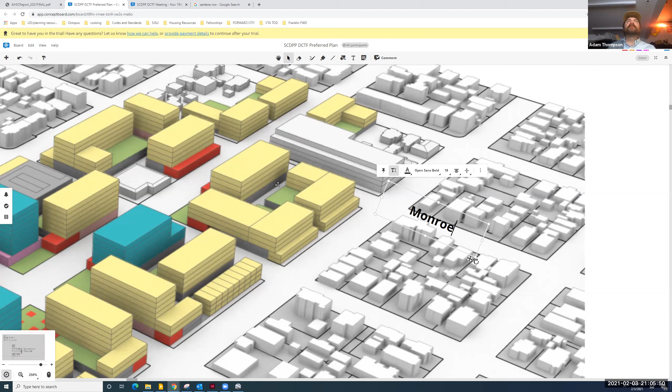Well, it's hard to tell. 1, 2, 3, 4. Sorry, 4 and what is that? 4 and 5. So this is 4/2. This is 5. This is 6/2 because this is an office building. The blues are office buildings and yellows are generally residential. I don't think we need to worry about the type of use. I think it's more just the maximum height that we're looking for in each kind of area.

Where did you want to start, Adam? We're gonna move clockwise from Gateway all the way around. So right now we're talking about the Mio Vecino property, right there where Tisha is. And then we're gonna work down through Prometheus's and around Santa Clara's property and back up Homestead. Okay. We don't have the notes from the last one. I don't know why we're reinventing the wheel.

ConceptBoard, Butch. We do have them, but because we were running into the issue of too many comments on the board, the consultant saved them and cleared the board so we could write on it tonight. That's too bad. But we have a recording of that meeting that we can go back and take it off the recording? Oh, absolutely. I think with an hour left to go, redoing what we've done already is not an efficient use of time. My opinion would be finish Benton Street because that's where we were. Go back and get the notes and plug those in at a later time. I don't remember which ones we still had left, Butch, to be honest. We did a lot.

Well, I think Lafayette. I recall on Benton. So at Benton and Monroe, sorry, I got a call coming in. I think we hit Lafayette and we just kept marching down both sides, right? Yeah, so we were at Benton and Monroe, and we were talking about would there be retail where retail is now? Because hold on, I want everybody quickly.

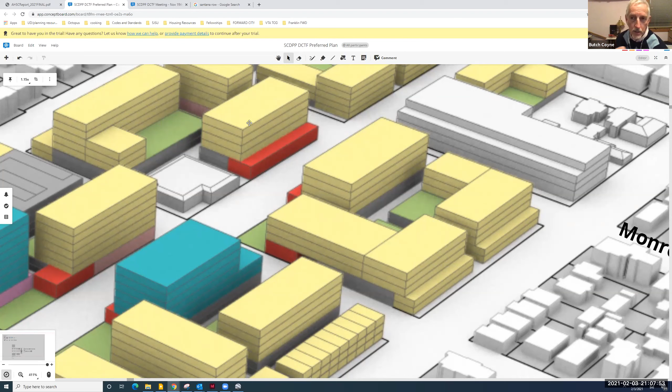Right, and that was already set, Mr. Chairman, because I remember we talked about the Lafayette and Benton Street being unrestricted and going around, so I'll leave it up to you. Yeah, if I had the notes, Butch, I would love to just go off it, but I don't. I want to just get it done so we don't have to come back to the concept board. So if we're okay with what is being proposed here now, we can say 4 stories is good, 5 stories there. We can move on to the next quadrant.

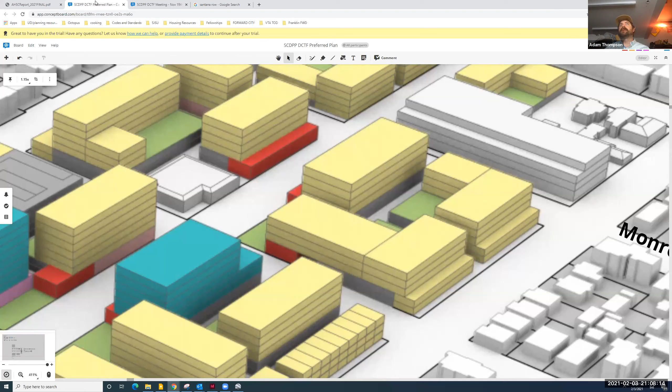We're spending a lot of time talking about process. So I'd like to just mark it up and be done with it. Adam, just to add to your very important point, I would say let's not talk about every building in every quadrant. I don't know if that's the right thing. It's per quadrant. That's all we have to look at. What's the maximum per quadrant? Okay, because I would rather suggest to think about conditions across the street and then see what's the nature we want based on the things around it, because the configuration of buildings within a block might change.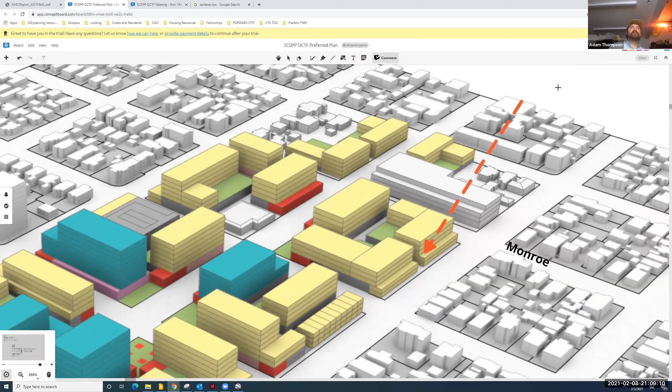That's not set in stone. Well, even these buildings aren't set in stone. So, just for instance, again, mentioning that there's single story bungalows across the street on Benton, we need to be more sensitive to that quadrant than Lafayette and Benton, where we've already said higher densities or higher heights would be allowable. Got it.

So if we all want to table this, we can table it and you guys can all input what you want and I can take an average. No, I think that makes sense. We should go through this. Let's move on. Let's get going. You've clarified, Adam. Let's move forward. Yeah, thanks. Yep, let's go. Start where the arrow is, right? We want to start there.

Sure, yes. Okay, so I feel like just looking at that, my gut says 2 stories on the bottom and then 3 above it feels weird to me. Disproportionate. There's something odd about that. It depends on how far back it is, but I'd almost say, what do you think? 3 stories, 5 stories, or I'd like 2 to 4. I don't know. What do you guys think?

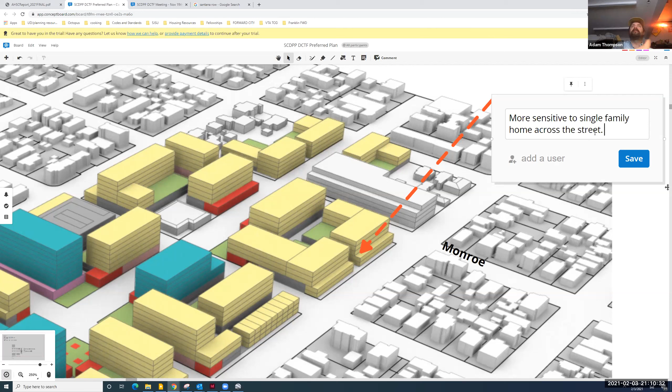I'd like to say, and this is coming from the ERC board, Lesley, you guys had it where they set setbacks for multiple stories based on what it was adjacent to. So maybe we throw out a maximum for the quadrant. We say, hey, if you're across the street from single family residential use, you can have a maximum of 2 stories, and then you have to do a 30-foot setback. I'm just throwing it out there, because that's what we did. If you're across from commercial, you could do up to 4 stories with no setback.

Got it. And do we have that setback number? Was it 15 feet, 20 feet? We can make it up. We don't have one. Okay. I think the one that is showing here proportionally should be about 20 feet. I'd agree with that. My reasoning is economic, which would be motivating this change to occur, and make it economically feasible for the owner. For buildings directly across the street from residential, maximum two floors and then 20-foot step back for additional floors, correct? Correct. That's my take. Weigh in anybody, please.

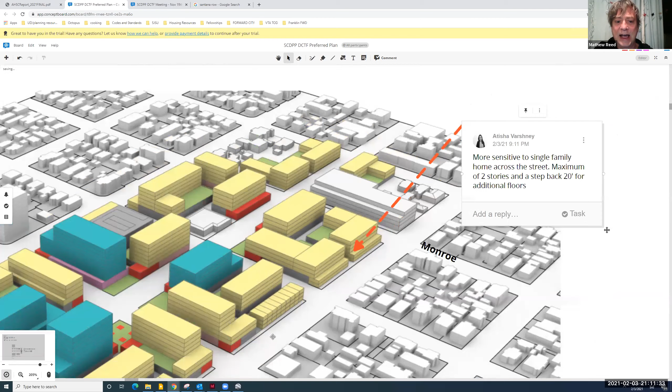The north side of Benton is not zoned residential, right? It's commercial mixed use or something like that. How many actual residential homes are there? A lot of them are residential, and they are zoned downtown community, but that zoning doesn't really pertain to anything, to be honest.

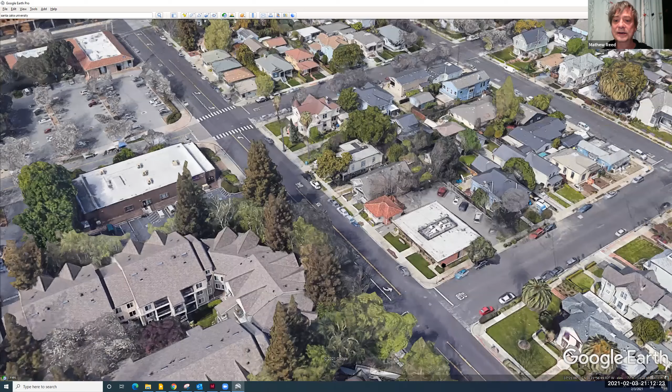Well, except that it'll exist, and so the future use of that land is maybe different than it is today. I don't know. I'm visualizing the childcare center and a couple of offices. Anyways, I'll just stop. Just because it looks like a house doesn't mean it's a home. And so I think there's a difference, and some of the surrounding areas are zoned with flexible use. Some of them are already non-residential. I know there's that great house on the corner, so there's clearly issues, but I just think that's worth keeping in mind.

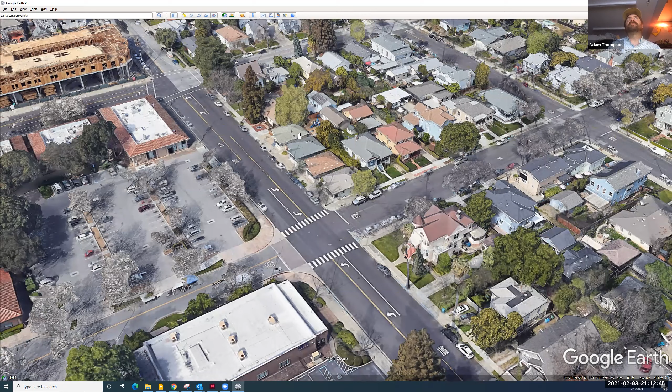I would say though, if there's one residential within a block, then it's considered residential, because I don't think it's fair to say, well, you have one business across the street and two residences, and we're just going to build a tower in front of them. I think we need to be respectful, even if there's only one residence that would be affected. There's also a shading component as well to this.

Adam, I kind of agree with Matthew in some of these things, because we cannot plan the downtown thinking what this one owner is going to do with the property, because if the downtown takes off, and if this owner is making a lot more money by turning this single family home into a commercial property, they're going to do it. So we need to find the balance.

And if the balance is more about sunlight and shadow casting on them, that's a more reasonable discussion. I know there are a lot of people who live here and I want to be totally respectful to them. But at the same time, if these land uses are already zoned, purely as an urban planner, I know these properties get flipped when the market takes off.

And Adam, just to follow on to that, when the other side of Benton was zoned as mixed, as business home, Downtown, whatever you call it, a majority of the neighbors had to say yes to that, correct? I have no idea. Lesley, do you have a call on that? Not necessarily. When properties are rezoned, that's actions taken by the city council. Property owners who are being rezoned are notified if this is something the city did. I don't know the history of the rezoning.

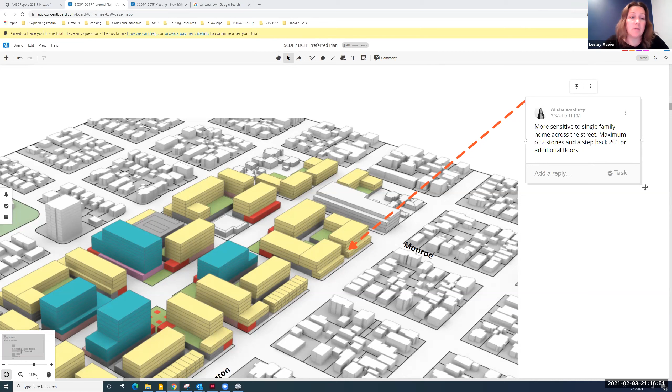Can I just add really quick? There's no height limit for properties that are zoned with the downtown zoning district. Not all properties have that zoning district, but within 8 of the blocks, and some just outside of our boundary, that's the current regulation. There's no zoning height limit. It's FAA height.

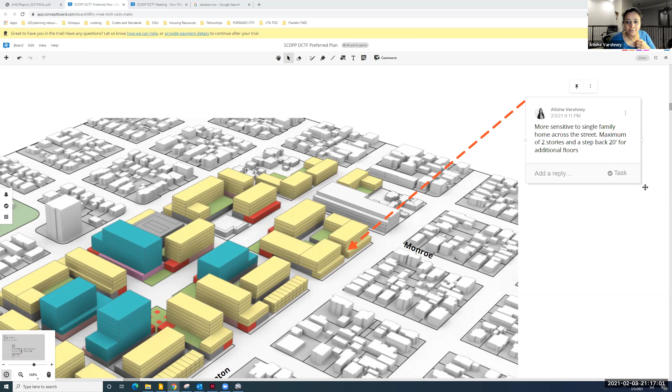Thanks, Lesley. If you want, I can show you just really quick what the zoning district looks like. Just going to share my screen really quick. Well, while you're bringing that up, to Rob's point, for consistency's sake, it doesn't make a lot of sense for that block to change so suddenly from the other ones coming up from Lafayette. Oops, sorry, just made that wrong way.

Sorry. It's more like, do we want to imagine going down the street? Adam, you kind of brought this up. What would feel right there, right? Is it 3 stories all along on the left side? And those other buildings, they get taller after the building, they're not mid-building, so is that something we want or to ask for?

Yeah, Rob, I'd agree with you because we had an initial conversation trying to keep Benton Street a neighborhood feel. And consistency would make a difference. And then as we get to Franklin, we could go higher, change it. As we got to Homestead, same thing over there. But the conversation was keep it a neighborhood feel along Benton Street.

Then I would say, why don't we just show the same thing that we're doing, rather than having this 20-foot thing, just push it back to align with those other buildings, right? Just keep doing it. Again, this is not the way it's necessarily going to be built, but this is our suggestion. And then that kind of solves Benton.

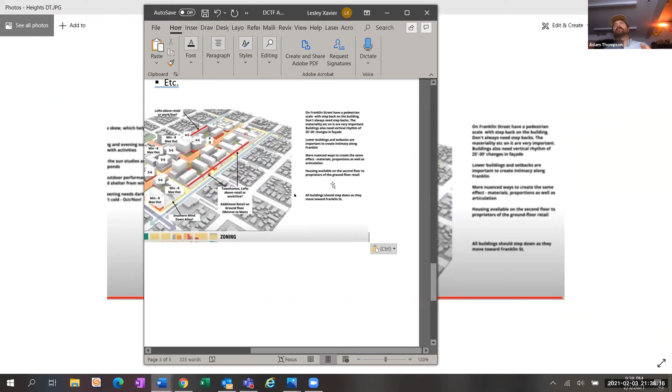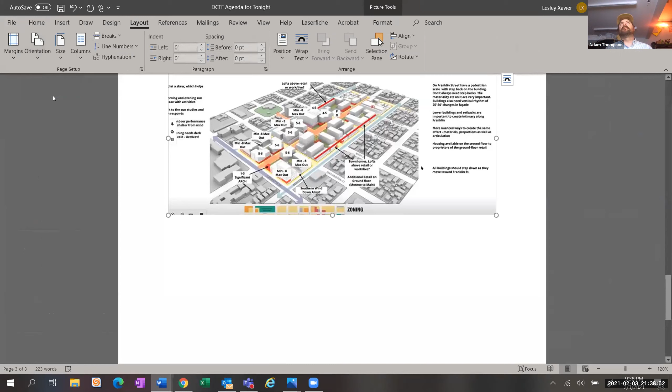You're absolutely right, Matt. The thing is that we're trying to give them a starting point, right? So that they're not coming in blind, and we're not getting blindsided. Obviously, if it economically does not work and they have to say, hey, we need 6, well, then that's a discussion point. But at least the community is already saying, this is what we feel is acceptable, and this is where we'd like you to start. If there need to be adjustments based on all of our other needs and desires, then we can work through that with them. But it's better to have direction provided versus just getting a proposal and then having to scramble and figure out what's going on, and how we can assimilate it into the existing neighborhood.

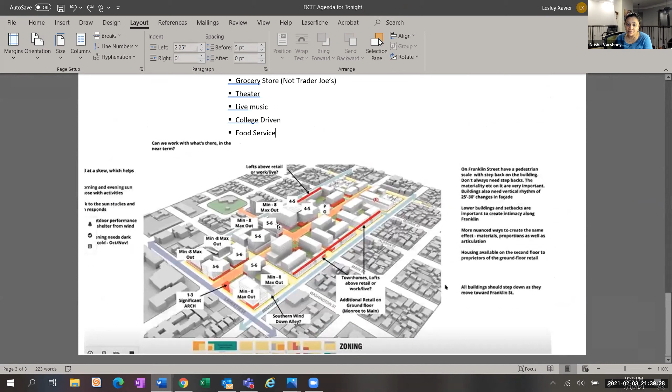I agree. People respond to expectations though. And so you may be creating a box that you think is flexible, but it's going to drive people's thinking. Yep. Matthew, I'm pretty much with you on that. As much as we want to control every corner of this downtown, I hope I live to see that. This is a very long process. Plus, we are not the ones putting our money in it, doing it. So we need to understand implementation realities pretty hard.

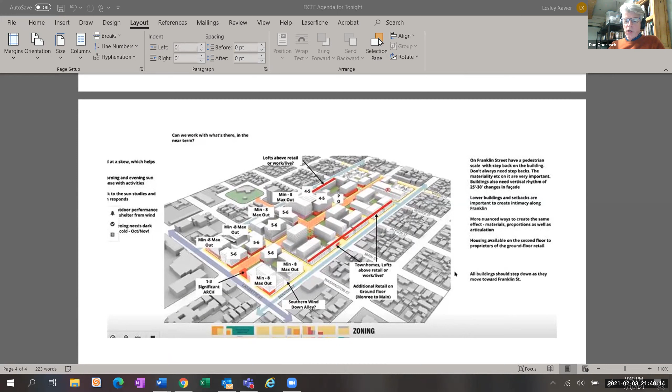Well, we do. Some of us actually have money into it. We have property in the area, right? So it does affect us positively or negatively depending on what we end up building. And there's a lot of people who have their entire life savings tied to their home. So we have to be. But one thing I want to say to the counterpoint is that when this thing's built, the value of each home is going to go up quite a bit. You've got a downtown within walking distance of your home. It's going to take a long time, but yes, that's the hope.

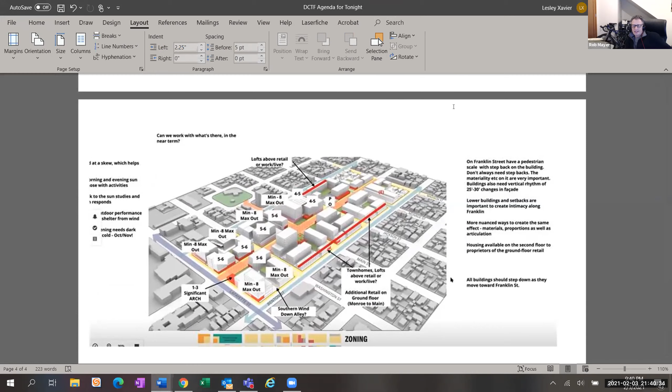Yep. All right, so we still have architecture and then 2 other subjects, which we're probably not going to get to tonight. Architecture, or do we want to table that? Yeah, I think that's for a later date. Okay, we can table that. Does anybody want to make any additional comments on height and density, or do we want to move on to land use and intensity? Let's move on. All right, moving on. Thank you, everybody. Land use and intensity. This has to do with what we talked about earlier, which is units per acre, where we want different pieces, public garage, type of housing, for sale, bedroom units, micro lofts, that kind of thing.

Retail, which we've already kind of touched on. So I think this is mostly focusing on just the units per acre and some of the key components that will make up the downtown. I think it's super important. This is the problem: Gateway Crossings is all one type of housing, apartments. And it's frustrating in some ways. We do need to make sure we have a good mix here, right?

I mean, I think apartments, that feasibility study, was it the apartments that was the most? Townhomes. Townhomes, okay. All right, so that's good. I don't know. Do we want to have specific buildings dedicated to a certain type of housing, or, for example, have the micro lofts sprinkled throughout different blocks?